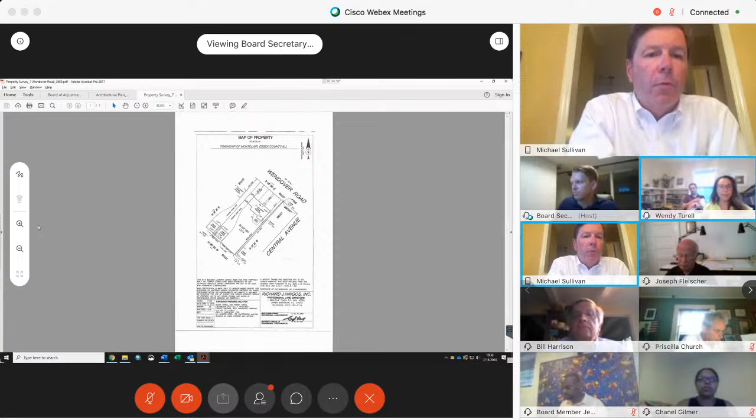And we also have Mr. Erik Schultz, the architect for the applicant as well. I'll swear you in. Mr. Schultz, would you raise your right hand? Do you swear to tell the truth in the matter pending before the board? I do. State your name and address, please. Erik Schultz, 35 Alexander Avenue, Montclair.

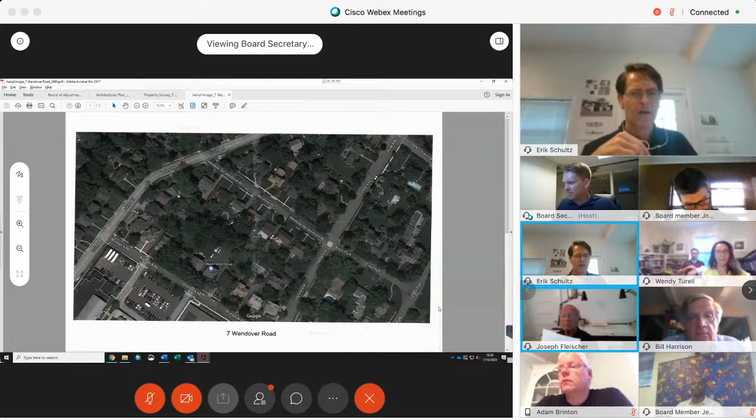If we go to A0, the first architectural plan, on the left you can see the footprint of the existing porch extends out about 12 feet from the footprint of the house, whereas the proposed would come out about 10 feet, 2 feet less than the current porch. The addition would extend along the line of a side wall, meaning the new addition would also be 4'3".

If we go to A1, the next drawing, it shows the existing condition in more detail, the existing porch in relation to the kitchen. And then if we go ready to A2, that's the proposed kitchen.

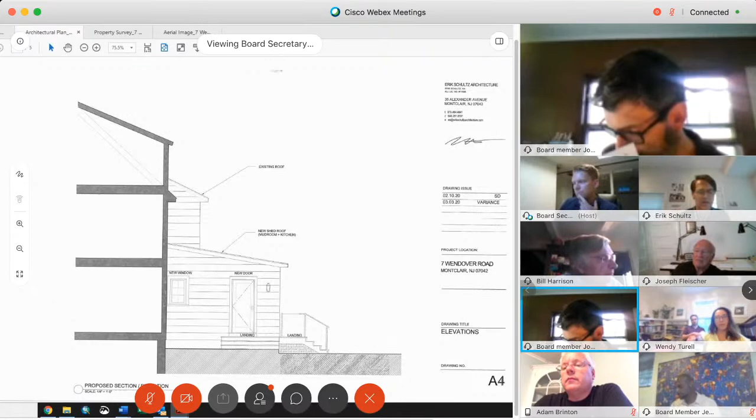But if you go to the next drawing, A4, that shed roof is a little bit steeper than the existing, which is very flat. This is a view from the interior side, looking at the new door to the mudroom, and then a window for the powder room. And that's basically it - kitchen, mudroom, and powder room, 18 square feet along the side lot.

Okay, are there questions from members of the board? I guess we should go through individually. Sure. Mr. Moore, do you have any questions? I do not at the moment. Mr. Fleischer, do you have any questions? I do have one question, clarification.

When I looked at the survey, it looked like the other yard was also under 10 foot. And though I know this has nothing to do with that side of the structure, do we not have to approve what is ultimately the total structure when it's there? So I just want to protect the applicant - there's no issue with the fact that that is not 10 foot on the opposite yard. And if it is, then if we're going to approve this as submitted, we ought to approve it with the recognition that both side yards are non-compliant.

Graham, do you know? I mean, the applicant is not proposing any change to the 9-foot side yard, and the ordinance requirement is 6 feet from one and 10 feet from the other. So it kind of depends on how you interpret this - the 9-foot side could be the 6-foot yard that is compliant, and the 4-foot yard could be the 10-foot yard that's deficient. So in this case, we could look at this as having one deficient yard. In the other case, it could be that both yards are deficient.

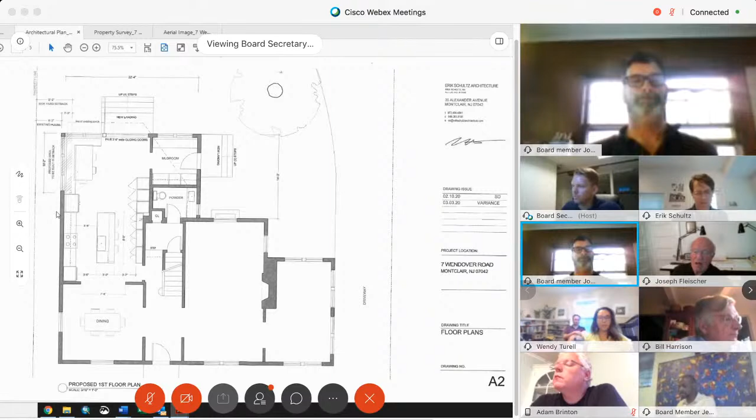Well, it's certainly possible, but not preferable in order to maintain a nice flow to the backyard. It's not a very wide kitchen, it's going to be about 11 feet from the wall to cabinet. So if we were to bump in, it would give it a bit of a tunnel-like feel, and maintaining that line reduces any awkward circulation but also makes it feel not so narrow.

Okay, thank you. That's it for me, Bill. Okay, Mr. Simon, do you have any questions? No questions. Mr. Birch, do you have any questions? No questions. Mr. McCulloch, do you have any questions? I just...

So if you were coming up the driveway and parked along the side of the house, you could enter the mudroom directly from the driveway without having to do a lot of patio stonework and eating up the backyard. Whereas the sliding doors allow you to come in and out from the kitchen to the backyard. They have a long and narrow backyard, so there are two separate entries instead of people coming in and out of the backyard or going to and from the driveway getting clogged in the same path.

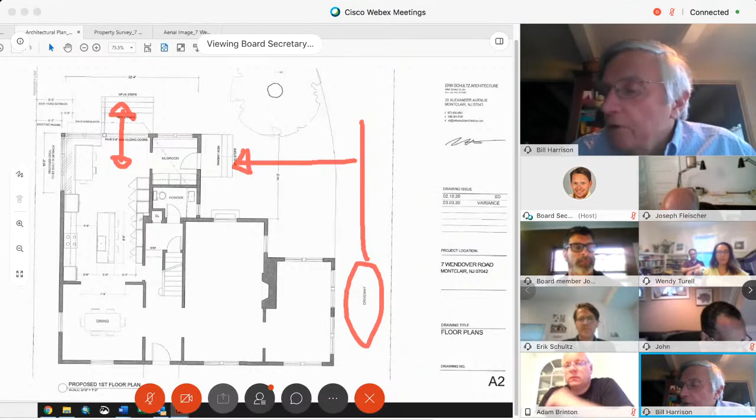Okay, Mr. Caulfield, do you have any questions? Yeah, actually, Erik, how are you? Good, how are you?

There's not going to be any windows on that side, are there? On the setback on the side of the new kitchen? Correct, those will be upper cabinets. But obviously the built-in seating area has a ribbon of windows facing the side. There are 3 new windows facing the side, and even though we're taking away 2 small windows, we're adding 3 large ones along that elevation.

That's the range up against that wall. And Erik, is there going to be a rail? Do you need a rail for that mudroom? Okay, all right, thank you.

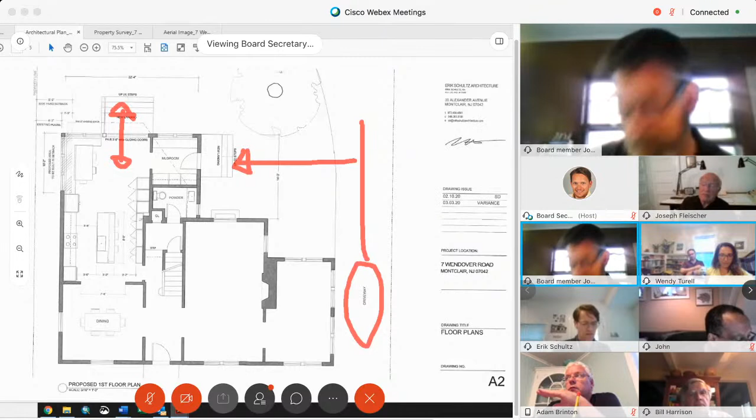Ms. Gilmer, do you have any questions? Yeah, I had a question. From what I can tell, the tree looks like it's going to be close to where some of the work will be done. Do you know if the root system will be disturbed by the work? My guess is that we're at least 10 to 12 feet away from where we're working, so I didn't think that would be an issue.

It's a small crawl space underneath the mudroom, so I don't think the landing will disturb it. We wouldn't disturb the roots in order to support the deck. There's ways to do that without upsetting roots.

And if for some reason it were to be disturbed, you would replant another tree in the place where I guess the dying tree would be? Well, I don't think we would disturb the tree. I think in that case, instead of doing a crawl space, we would just pour a slab of concrete at grade and not do the crawl space.

We'd figure out a way to do it without disturbing the tree in the mudroom area. I'm proposing a crawl space underneath it, but there's a possibility foundation work could disturb the roots. If so, I would not build the crawl space and just pour a concrete slab as the foundation, essentially pouring over the roots so we don't disturb them. It's more difficult construction, but if we don't want to lose the tree, that would be a way to save it.

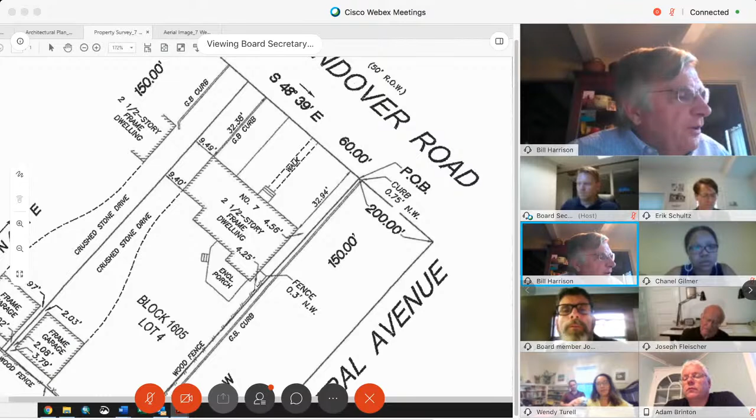Not that I have a problem, but I just want to clarify the dimensions. On the survey, it seems to indicate the front of the house is 4.56 feet from the property line, and at the rear your drawings show the existing house being 4 feet 3 inches. It would seem, which is the equivalent of 4.25 — I understand, but the house is at a slight angle, which would indicate that if you make the addition line up with the house, it'll actually get a little closer than 4 feet 3 inches.

I don't want to have you surprised, but your addition is half an inch too close to the property line. I think when I measured that in the CAD, it's still above 4 feet. Oh, it clearly would be about 4 feet, but you're asking for 4 feet 3 inches, and it looks like it'll be slightly less than that.

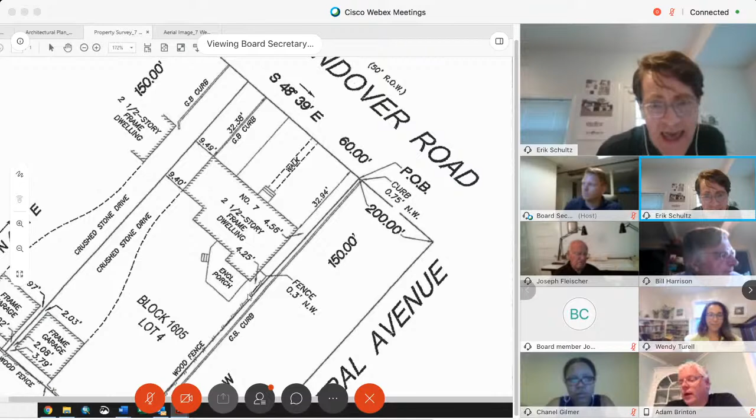It's entirely possible — I think it's not more than 2 inches, is what I'm saying. Yeah, it's a very small amount. I'm trying to figure out how best to word the condition, to make it clear so no one fights you over that inch or two. The difference between the front corner and the back corner is essentially 3 inches, and now we're going out 10 feet, so it could be 1.5 inches we're talking about. Well, I don't know if that's under a margin of error. It's one of those things that sometimes comes back to bite people in unexpected ways.

I don't know the best way. Are there any other questions from members of the board? I just want to follow up — we could probably say it shall continue the existing line of the house and get no closer than 4 foot to the property line. I think that solves it, and I support that completely.

Okay, Graham, you want to unmute the world? Are there any members of the public who have questions concerning the application or any testimony to give concerning the application? If you have anything whatsoever to say about the application, this is your chance to say something.

Anything further either of you wish to add before we discuss and vote on the application, Mr. Schultz or Ms. Turell? No, I don't. No. Okay, we'll start discussion with Mr. Moore.

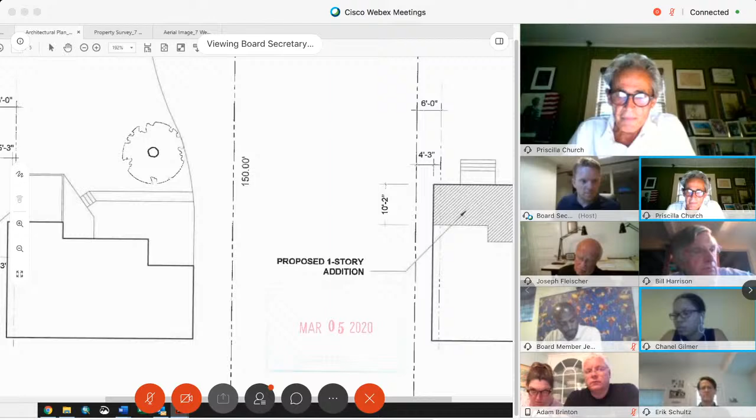Hang on one second. Mr. Sullivan, who was the next one? Mr. Simon, go ahead. Yeah, I'm in favor of the application. Okay, Mr. Church — I'm in favor of the application since that Wendover area, the lots are rather small to begin with, and I believe what the architect just proposed stays within what's there already. Therefore, I vote in favor of it.

Mr. McCullough? I'm also in favor, with the condition that I think the chair will set for the 4 foot proviso. Okay, Mr. Caulfield? In favor. Okay, Ms. Gilmer? Yes, I'm also in favor.

Mr. Fleischer: I'm in favor, with the condition that the side yard line of the house continue and get no closer than 4 foot to the property line. And I'm also in favor of the application. I think the applicant has demonstrated, given the existing location of the house, that they qualify for a variance and that it will not result in a substantial detriment to the public good or substantial impairment of the zone plan. It should have the condition Mr. Fleischer just stated.

Someone want to make a motion to approve the application? I make a motion to approve the application with the restriction that Board Member Fleischer mentioned. Is there a second? Second. Okay, Mr. Church? Okay, Graham, you want to call the roll? Sure — Ms. Gilmer? Yes. Okay, Mr. Caulfield?

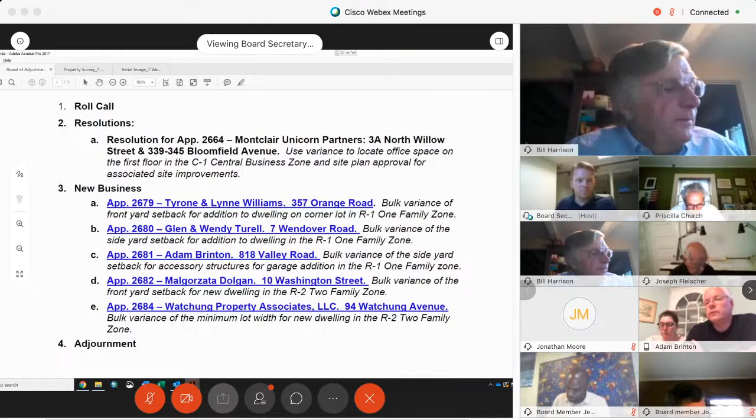Yes. Mr. Brinton, will you raise your right hand? Do you swear to tell the truth in the matter pending before the board? I swear. State your name and address, please. Adam Brinton, 818 Valley Road, Montclair, New Jersey.

Okay, Mr. Brinton, you want to explain what you're proposing to do to the garage? Sure. My wife and I have a detached garage in the back of the property, and the roof line is very low. We can't fit our minivan in it, and it needs repair. When we went to file for the building permits, we found out that because we have less than 6 feet of clearance between the property and the existing garage, we would need a variance to raise the roof line to the permitted 15 foot level. We have a little over 3 feet, 3 feet 3 inches. There's an existing pathway and a gate already there between the property line and our existing garage. To put it simply, we would like to put a new roof on the existing garage that's higher, and not change the footprint of the garage at all.

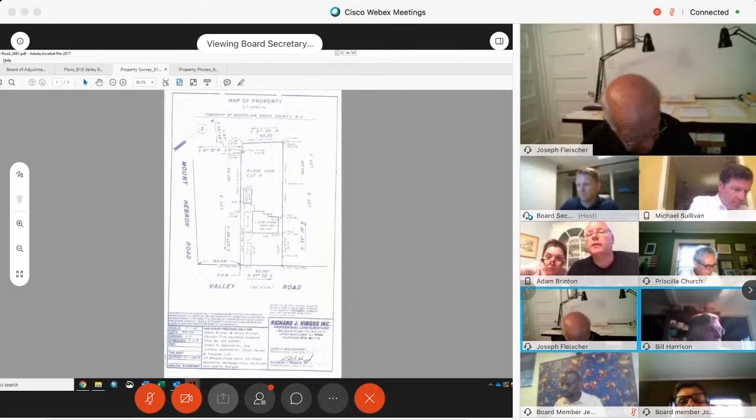Are there questions from members of the board? Mr. Fleischer? I do have a number of questions, actually. I saw the historic preservation report related to the property, so I don't know whether the applicant has agreed to follow the requirements. Will you abide by the requirements of the Preservation Commission, which has to do with the window configurations primarily and the materials? I apologize, I haven't seen the report.

I think they asked that the windows be 6/6 pattern to match the existing window, and we would have no objection to doing that. And I believe they asked for the roof to overhang a bit to match the style of the house, and we would have no objection to doing that either.

Okay, let me ask. The other question I have is there are no plans of what you're doing, but you're adding dormers as I understand it. And I have no idea, even for example, which way the dormers are facing from the documents. So I don't know exactly what we're approving.

Sure. The dormers go the length of the garage. The garage is 12 by 20, I think is the measurement, so they go the 20-foot length. So they would not be viewable from the street. Only the front of the garage is viewable from the street.

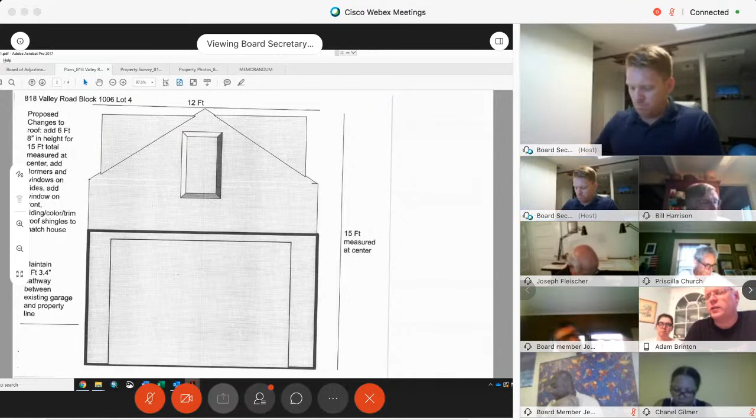I suppose they could, but then the roof wouldn't be balanced. And there's no adjacent structure to the garage. It's standalone, I suppose. It's detached, and there's no house next to it or anything.

And the property does rise up in the back, does it not? It rises up substantially. The back of the garage, there's some pictures in the application. I stand above it when I'm on the ground. The garage is built into a slope, into a hill.

I guess what I'm looking at, if you look at the photos you submitted. When I look at the array of photos on the sheet that has the 4 photos that shows the back of the garage, it also shows that structure on the right side in the lower right-hand photo. Graham, can you put those up? The photos? Yes, I have the photos. All right, keep going.

The issue I had was relative to the fact that the dormer is literally right on the property line looking into the neighbor's yard. Now, right now, we know that it's being used for storage only. So the question is, why do you need all the windows in there if it's storage only? We're assuming it's not being used for any other purpose other than storage. So I'm raising a question because I have some concern about the privacy of the people in the house next to you, in the rear yard.

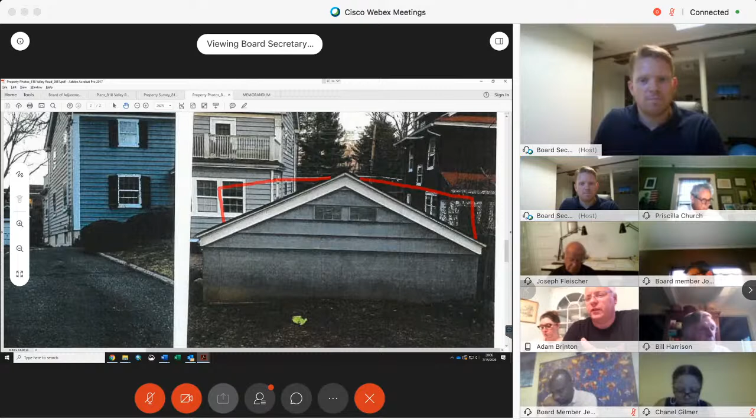Do you have an opinion? Yeah, I'm concerned whether the Preservation Society... Okay, which one's that? The Preservation Society was really concerned that it would balance out and not differ from or look different than the style of the house. So I'd like to keep it on the side, yeah.

The whole idea was to raise the bikes on racks and put our stuff on shelves and have the windows in that space. So yeah, I would like to keep the dormer. So that whole group of 4 windows, which will now be 6 over 6 windows, will be on both sides. That whole group of windows will be different.

Again, I keep seeing different pictures of what it looks like, I'm sorry to say. Because that shows the dormers quite a bit lower than the 15-foot, but the next illustration I saw shows the dormer virtually up at the same 15-foot height. Yeah, the windows aren't intended to be at the ceiling height. I apologize, I did these myself, so it's not an architect drawing.

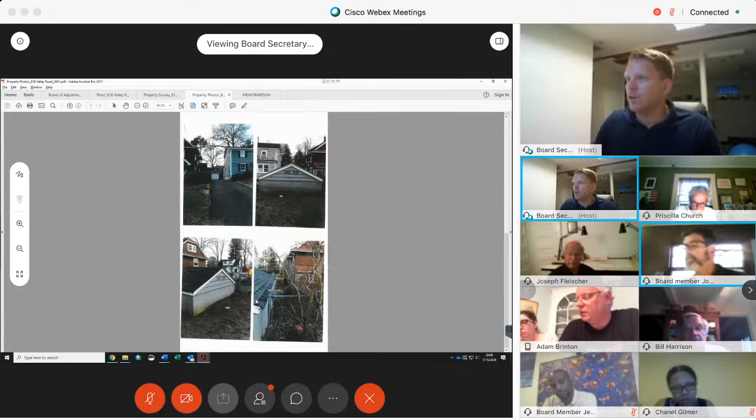It was just supposed to be a representation. The dormers that we're basing it on, the window wouldn't be at the roof line. The roof line on the other image, Graham, the eaves come out a little lower than the roof line and straight. This photo? The other drawing that we submitted. Oh, the other drawing, hang on one second. Yeah, that one shows the dormers virtually up at the same height as the 15-foot.

The next sheet in that set, keep going, maybe it's not the next one. That one shows that new roof line literally not even in the same direction as the one shown on the drawing. Right, the dormers would come... The documents don't show what it is we're approving, is what I'm saying right now, because that's literally a new extension on the upper floor. It is not what is shown.

If you go back to the previous sheet, it is not what's shown there, the previous sheet being the front elevation. If you look at what's shown on this drawing, then you look at what's shown on the front elevation, it's just not the same. I don't know how high this thing is for the dormers.

The dormers are supposed to be below the roof line, at least that's what I was told. So I drew them here below the roof line to show that they didn't go to the roof. The windows would be below the roof line, which is why on the side view they're below. And on the front, the roof line for the dormers, I was told it comes out of the top of the roof and down, so it's shown a little lower when you look at the front view of the proposed.

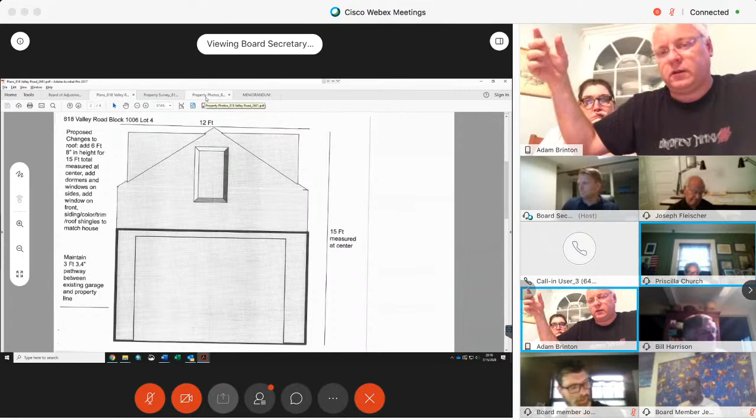Right. So maybe if I could explain it—I didn't want to change any of the existing footprint, I just wanted to raise the existing type of roof up by using wood on top of the cinder block garage. And that's what the contractor said he would build up, and then he would just build out dormers on the side. So he said to get approval for the dormers on the sides.

And the dormers would be coming out from slightly below the roof line, and the windows on the dormers—which I thought were called eaves, so I apologize—would be lower than that, which is why I drew them lower in the diagram. But I could see that I'm not an architect, and I apologize that it's not accurately depicting the scales that an architect drawing would.

But again, I'm not trying to change the existing footprint in any way. I understand. All I'm trying to find out is what is the actual configuration, and your drawings can't tell me that—that's my problem right now. I don't know what it's going to be like when it's the actual configuration.

Okay, well, I think Graham's trying to help me, and I'm trying to help out a little bit. Very appreciative—I mean, literally, figuratively, the view that Graham just drew is exactly what we're trying to do.

So let me ask you, Graham, since you're designing it—did the side of the dormers come down, or are they straight up and down? Because that's not shown in the documents.

Well, based on Mr. Brinton's discussion with the Historic Commission, he talked about these being essentially shed dormers with a sloped roof and then a vertical wall along the face of the dormer on each side of the garage for the extension. There are two vertical wall elements that will be added—one is this area, and then here at the dormer.

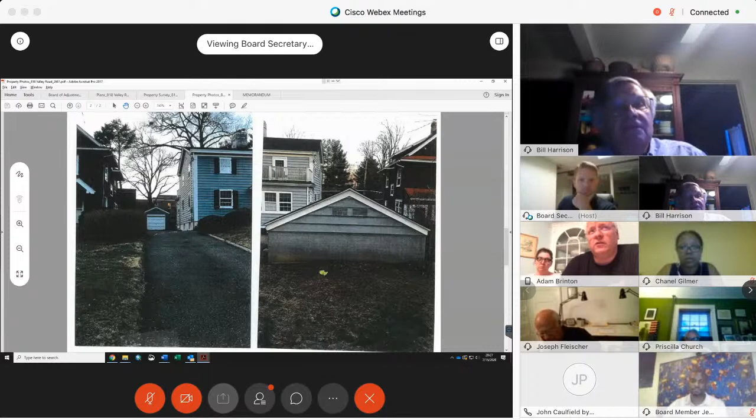Okay, so do you know how far out you would be extending it? It's the overhang on the house is about 6 to 9 inches. Yeah, so this here, yeah, it's about 6 inches on the inside, and with the trim it's like 9 inches.

Now I'm trying, I have the same concerns Mr. Fleischer did, but I'm trying to partially get an understanding of what this looks like, based on what you're actually going to end up with, based on the definition of height in the ordinance.

Graham, is it correct that the height will be measured based on the average height going all around the building? Correct. That's 10-foot intervals around the perimeter of the structure to the peak of the roof.

So based on the significant difference between the elevation at the front of the garage and the elevation at the rear of the garage, the entrance to the garage, the front of the garage, that's going to end up being somewhere between 18 and 20 feet above grade. Is that correct?

We don't know exactly how it's going to be, but just visually comparing the difference between the front and the back, it'll be several feet higher than the 15 feet.

I think Mr. Brinton, since you did the plans, you can tell us, the existing 12-foot measurement that you had on your plans, I think that's the existing dimension. Is that not correct? The front of the house. That's, I guess, the width, the height.

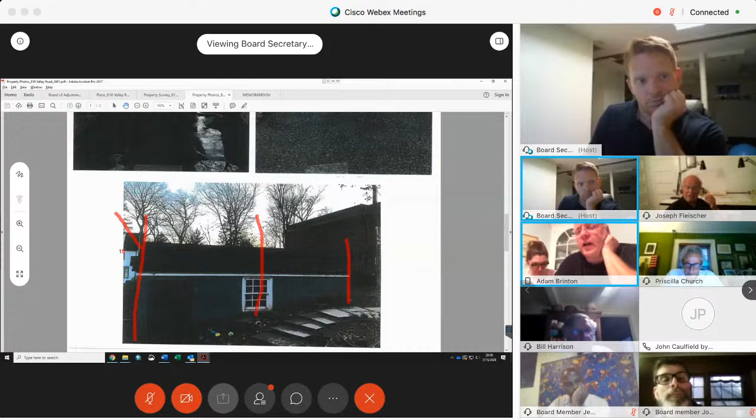I was proposing 15 at the center, measured at the center. 15 here? Yeah, which is, I thought, how you measured it. But at the peak, 15 at the center sounds like it would work. So, yeah, right, we have to talk in two dimensions.

So let me go back to the plan. So 15 would be to this center here, to the peak. 15 to the peak, yes. To this peak here, measured to the driveway at the entrance to the garage, correct?

Graham, I'm going to interrupt, because we're having a conversation which was exactly my concern. I don't know how high or what this thing looks like, period. I don't know where the 15 is measured from, because if I look at his drawings, the 15 shows the equivalent of what 12 was in the other house, which was 3 foot higher than the front of the building. And now we're talking about 15 feet from the middle of the building. So we have no consistency in measurement, drawings, or information.

And I don't know how you approve something without that information. I guess that's what, because we're not sure what's being talked about. Because there's a chance that will be 17 feet on the front if we're going to the 15 feet in the middle.

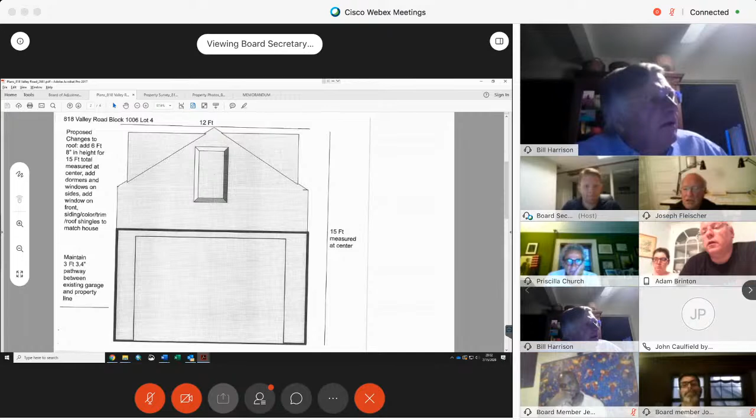I mean, we can make it 15 feet from the front. I apologize, I just thought I was supposed to measure from the center. Well, code, it's not how it's done, but that probably is effectively what would be how the 15 feet would end up being. So if it's 15 feet at the center, it probably would comply with the 15 feet in the ordinance, but that would mean the front of the garage would be several feet higher than that.

I think we're mixing up what he means by the center right now. I think he meant the center of the front of the house. Just the way we're looking at it, the elevation that was previously 12 was going to go up to 15. I think that's what he means by the center. Correct, that's what I think he means.

Not the way the ordinance is written. When we're using the word center, we mean the center of the sidewall or the center of the front at the peak. That's why I'm saying we don't know what this is about at the moment, unfortunately.

Okay Mr. Brinton, let me ask a couple more questions before we get back to this fundamental problem. Will there be any heating or plumbing in the building? No. Okay, and then I'm a little confused as to what I'll call the dormer level - will there be a floor there or not? No floor.

Okay, so it's just going to be a one-story structure that you're getting the extra height so you can do more things, as well as drive your existing vehicle into the garage. Yeah, that was the intention. So effectively, given it's not a big garage, the bikes etc. would be hanging above the car. That was the intention, since I had to do the garage roof anyway, and since I had to go through zoning, I thought might as well put the dormers on it so we could use it for storage too.

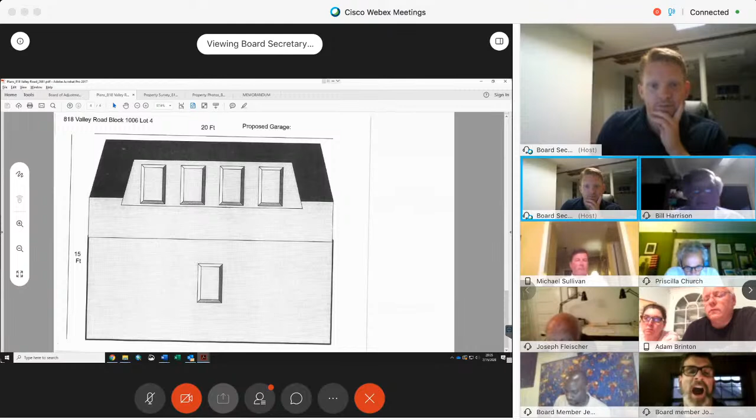Are the windows facing towards the school? Is this a public question? Oh no, this is a board member question. Oh sorry Mr. Moore, my apologies. May I answer the question? Hang on one second, let's just make sure there's no public questions. Last call for any public questions on the line. Okay, hearing none, we'll reset back up. Okay Mr. Moore, if you wanted to restate your question.

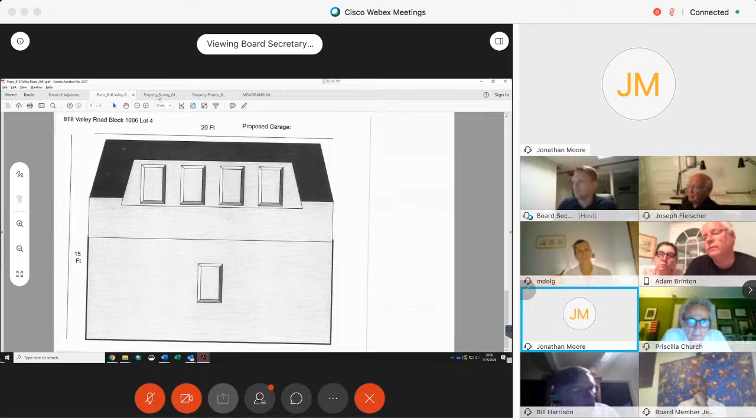Yes, my question is for Mr. Brinton. Mr. Brinton, the dormer windows, are they facing this elementary school or pre-K? No, sir. The dormer windows would be facing my property to my left. The elementary school view, the windows on the side of the school are probably back about 100 more feet, and it's not the classrooms. And Mr. Brinton, I've circled the facade in red that's visible from the elementary school, correct? That's what is visible from the elementary school, correct.

And there will be a window on that side? I hadn't planned on a window on that side. Okay, it'd be nice. I don't need one, no. Okay, thank you.

Before I give Mr. Brinton another opportunity, what is the board's preference in terms of how you would want to proceed tonight? I think unfortunately we may want to see a rendering that gives us a better view of what you were trying to convey to the board so that all members feel confident about it. I agree with that. It's kind of difficult to get the full picture without seeing the dimensions, and just leaving too much open for us to approve on the record.

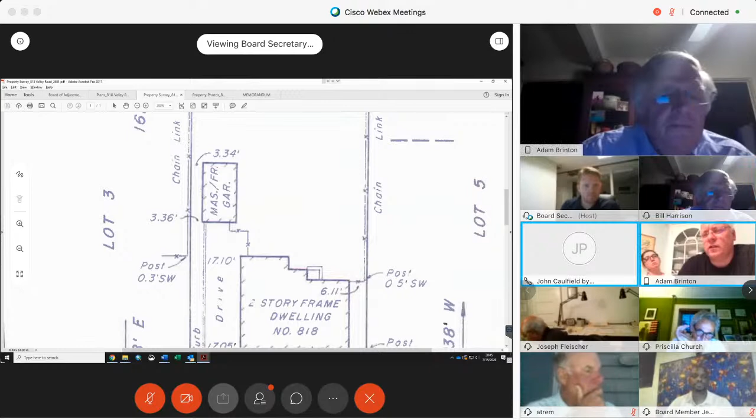Okay. Can I ask another question, since I'm going to have to now hire an architect and all this? So it sounded like a bunch of the questions were whether I was going to live in this, or there's a floor - would the board generally be okay with that? Because then if I have to go through this process, I was trying to avoid that.

But the reasons those were being asked - when we've had people coming in expanding their garages so there's an upper level, you're saying there wasn't a floor to solve that - those were, we normally put a condition that says no heating, no plumbing, to make sure it can't be used as residential space. That would require a bunch of different additional variances to do that, you probably wouldn't get that. So that's not why we asked the question. Oh, okay, the question was to make sure you weren't doing that. Okay.

So if I have to come back, and you're not meeting in August and you're not meeting probably till September, I guess is what was said. September 16th. I'm just trying to get my roof repaired before September. It's not, I can't get this. I'll just come back, okay. So I guess we'll come back and try to have more detailed plans.

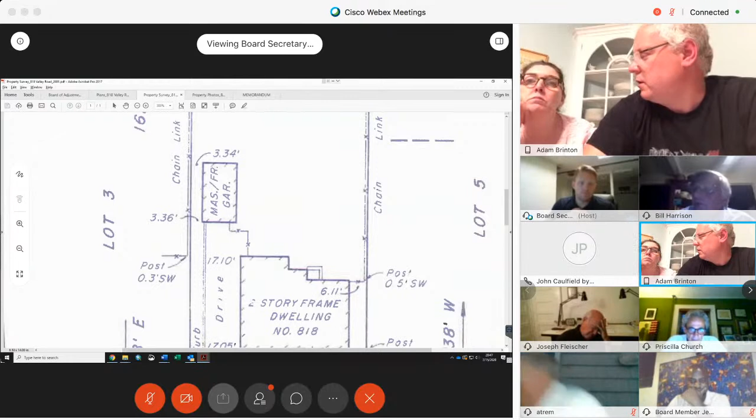If I just put a floor in there for storage, is that okay though? Yes, I mean, we're going to condition it to make sure it doesn't become living space, but we've had other applicants do that. I'm not guaranteeing an approval, but that's not inherently prohibited. Okay, because that would just make it easier in terms of drawing this up, the contractor said. But we were trying to make it just in the garage to make it easy for zoning.

Okay, thank you. Okay. Okay, so Mr. Brinton, just so it's clear on the record, you're requesting we carry the application to our next meeting. Is that correct? Yes, please, and I'll submit more detailed drawings for your next meeting.

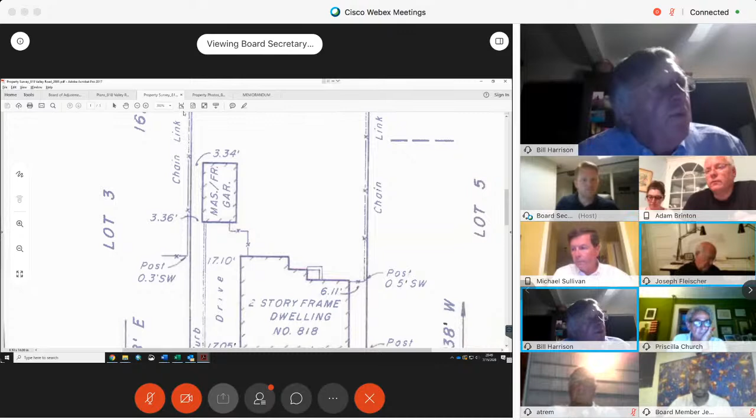Okay, so Mr. Brinton, we will see you on the 16th. First, start talking to your contractor about what he's capable of in terms of doing plans, and if not, go from there. Thank you. Thank you.

Next application is that of Malgorzata Dolgan, owner of property at 10 Washington Street. This is an application for a variance to construct a new two-family dwelling on the subject property. Property is in the R2 two-family zone district. Property is designated on the township tax maps as lot 16 of block 3010.

A variance is requested from Montclair Code Section 347-18B, to permit a lot width of 31 feet, whereas the required minimum lot width is 60 feet.

A variance is requested from Montclair Code Section 347-45B1 to permit a front yard setback for principal buildings of less than the required 25 feet. A variance is requested from Montclair Code Section 347-45C1 to permit a side yard setback for principal buildings of less than the required 6 feet.

A variance is requested from Montclair Code Section 347-45E to permit a maximum building coverage of greater than the permitted 25%.

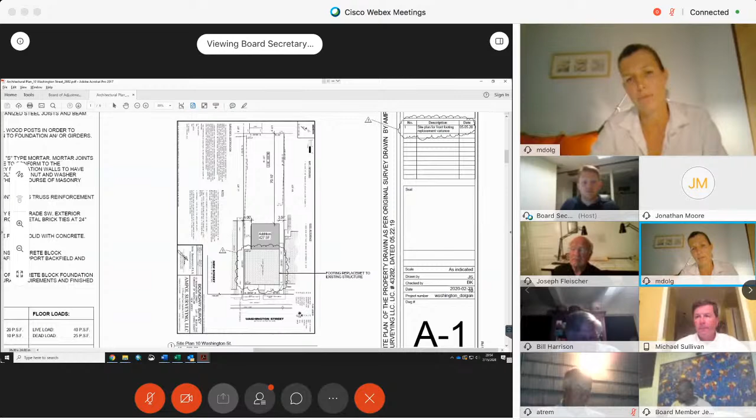Okay, let's clarify legally where we are. We approved a variance for the addition back in December. Because the applicant is to demolish the entire building, we are reviewing the entire building now. It is, so she needs a variance for the entire structure at this point. The series of variances, it's as if the building was not there. So, okay, Mr. Fleischer, do you have any questions?

Mr. Fleischer, did you have any questions?

Yeah, I guess my question is, in a sense, what I'm hearing is we're really starting from scratch, because she gets no benefit from that particular original footprint. Is that my understanding, Mr. Harrison? She is constructing a house on the property. There's nothing stopping us from considering or not considering that there was a house on the property a few months ago, but it's okay. The house is not grandfathered in any sense.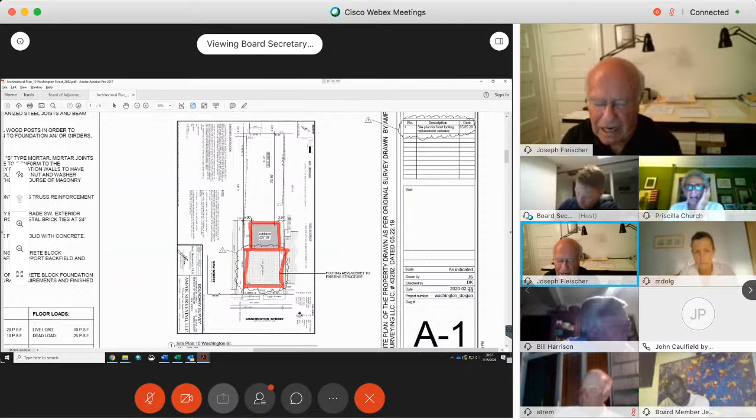And I'm wondering why not consider a different form that is more uniform for the entire building itself, as opposed to having what was once there as one building, and then as if there was an addition to it as a second building. I'm not understanding the logic of doing it, other than perhaps speed, but it seems to me that it's not a logical way to approach a 31-foot wide lot if we're not dealing with the existing structure. So I have a real concern about starting from the standpoint as if it was, emotionally or mentally, still standing there. I'd like to hear the applicant's reason for starting at that point, as opposed to rethinking it within the context of a new building within a narrow lot and coming up with a design that really is consistent and works nicely for that particular site.

Mr. Chairman? Yes, Mr. Church.

Right now, there's just a hole in the ground. There's nothing there. So my feeling was that what we're doing is we're looking at a new set of plans for a new building. The old building is not there anymore, it's gone. All that's left in that property are cinder block walls across the back, if you go look at it. But what she's proposing, I assume, maybe I'm dead wrong, is to build a new building in that vacant lot that's already dug out.

Am I correct that that's just going to be a new building? Yes. Are we relying on the drawings that we approved in December, or are these drawings different? Am I right or wrong? Ms. Dolgan, are these drawings basically the same as what we approved? Yeah, the drawings are basically the same. The layout is basically the same.

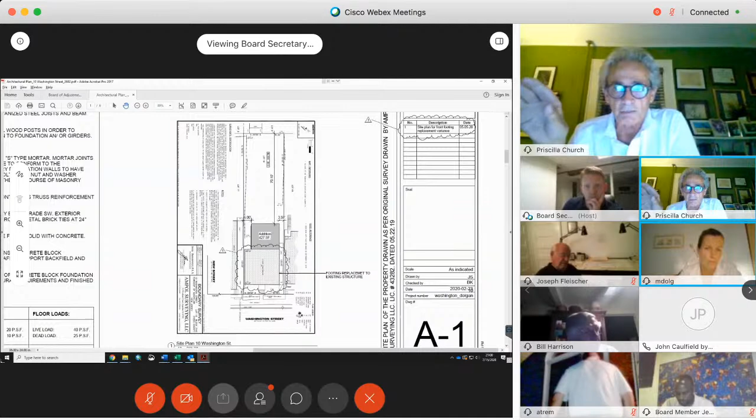So what we're looking at is a new building going up, because the old foundation was taken out. You want to put a new foundation in using the same dimensions and drawings for the building that you presented to us in December? Yes, because I couldn't save the old foundation, there was almost none. I understand that. By looking at the property, there's nothing there, it's just a hole in the ground.

Correct. So, Mr. Chairman, I have a question. If we already gave the variances for the previous design, then what is different now? If the dimensions from the foundation are following the old plans, what is the new variance that we're trying to approve here?

Well, the difference is that the application that was previously approved was an addition to an existing building. That building is now gone, so you have a lot that is essentially undeveloped. So it's a different application. You may view it as meeting the variance criteria, but it is a different application and she needs a new variance.

Okay, so it's considered a new variance, but it's the same conditions in terms of the side yard because of the dimensions—she's copying the previous dimensions. You may determine that there's a hardship based upon the lot width and these variances are needed and appropriate, but she needs new variances because the building is now gone.

Right, and just to follow up on that, we did not give a variance for the existing structure. She had set back the addition further from the east side of the property than the existing structure was, so we did not give a variance. She's now seeking a variance for 0.9 feet from the eastern side. We did not grant such a variance before because it was not necessary, so that's a new variance.

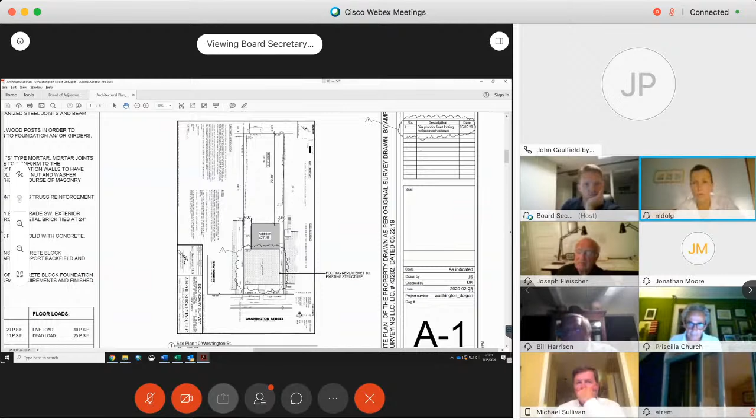When you had the inspection done on the home, did the inspector not notice that the foundation wasn't in good condition? You mean like a home inspection? Right. No, because there were so many things in the basement that you couldn't even see the condition of the foundation. You could barely even get into that basement.

Interesting. Thank you. I have a question. Yes.

I can't imagine that we would approve a new building with less than a 1 foot dimension from the property line. If we have to view this as a new building, we can't view it as if we're replacing the existing piece with a new building that's even wider than the addition we approved. The sense that we should approve something with less than a foot, with the kind of mass we're talking about, with less than a foot from a property line is not something I think we can do.

We might think it's okay, as in the first one, to have 6 foot on one side and 3.5 foot on the other side. That's possible. We could end up there. But we shouldn't be thinking about building a new building and putting it less than a foot from the property line. That's my sense, and I think that kind of precedent is very bad for a whole variety of reasons.

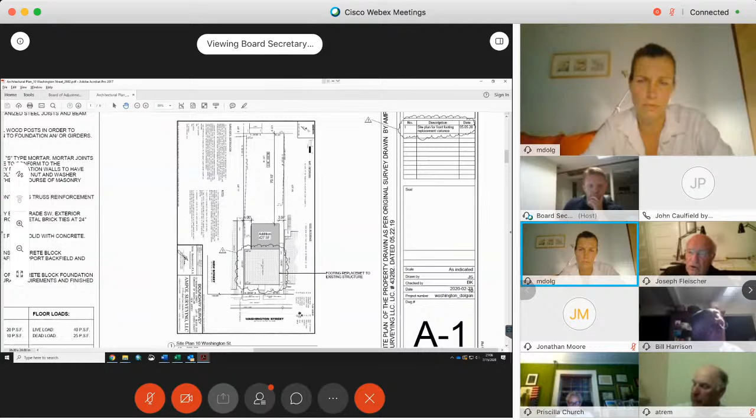I think it would be very dangerous for us to simply approve the old footprint because it had been there. Because then almost any structure that comes before us that has an existing footprint—they literally take everything down, period, and then say, I still want all the rights that the old property had. I think that's a dangerous thing, and that worries me a great deal if we do that.

Okay, Ms. Dolgan, do you want to give an explanation as to why you're seeking the various variances? I'm sorry, I couldn't hear you, Mr. Chairman, can you please repeat? What is your justification for the variances you're seeking, other than that you want to match the footprint of what was there?

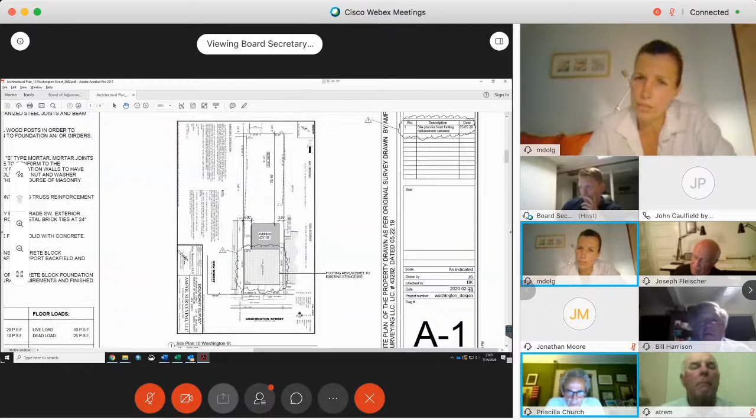Not really, Mr. Chairman, no. I mean, what I can do, if with your permission, maybe on the left-hand side where the side setback right now is only 8 inches on the front of the property and 9 inches on the back, I could push that whole wall to the right and do a workable setback and have 3.5 feet. Push that whole left wall of the existing structure over, and give it a more workable setback. Because then I can still work within those parameters with the design I have.

Okay. I mean, you've had a number of applications in this neighborhood, and I'm not trying to push you into something tonight before you have a chance to think it through, but have the building widths varied on the different projects you've already done? Yes, they have. Okay.

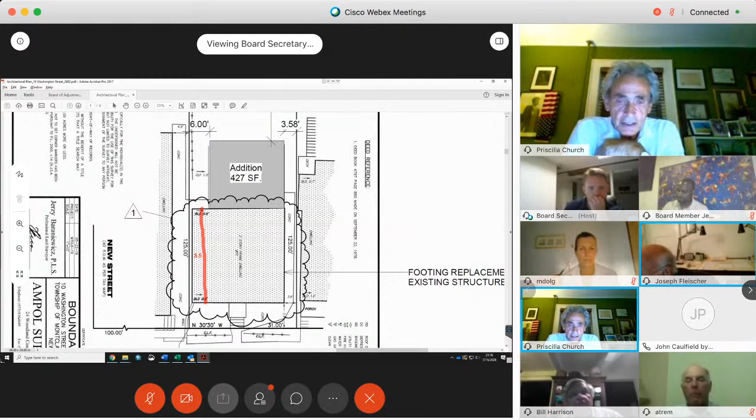Mr. McCullough? Yeah, the question I have is actually about the property next door, lot 15, the White House. Is that house currently occupied? Which property are you referring to? The White House, based on the picture that we have. Is it the dwelling to the right? Yeah, it's lot number 15. It's the one we gave a variance to a month ago. It's 12 Washington. Ms. Dolgan is currently renovating that, I believe, as well.

Okay, right, she is renovating. That's the one we gave a variance and said the parking had to conform or she had to come back. So we're still waiting for her to come back, or she's going to make the parking conform, one or the other. But for the improvements to the house, those are all approved by us.

Because the question I have is, given the fact that she owns both pieces of property, whether or not she can look at those in a way in which one actually complements the other. Because it is a very narrow lot, and I would agree with Mr. Fleischer. I think this beckons an opportunity to do something radically different than what we were considering previously. So I would be hard pressed to support simply maintaining the original design.

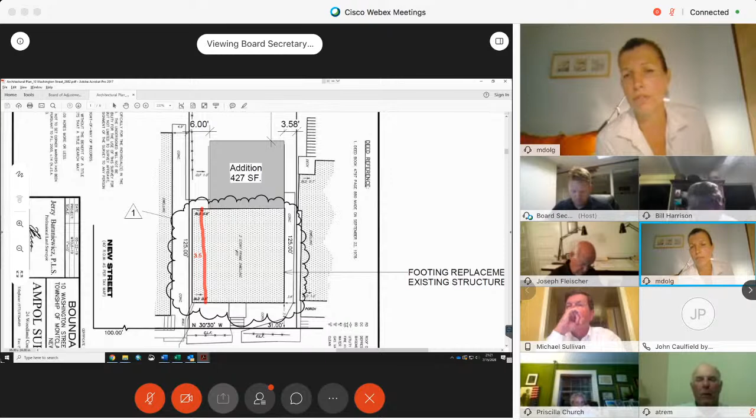Mr. Chairman, I have a question. The buildings across the street are really nice, and I considered doing something similar. However, they are 71 or 73 feet deep, while this building is only 47 feet deep. I know last time when we were going for a variance, the board members were concerned with the addition sticking out, then building on the left, building on the right, and then the church. I would love to do something like what we have across the street, but those buildings are 70 feet deep. If the board members and you, Mr. Chairman, are okay with that, I agree with you — it's a beautiful design and I would love to explore it. But my only concern is that I would be about 25 feet past the existing church and existing building on the left.

Right, I'm more looking at it in terms of the width they propose versus the width of those lots. They had some issues and were providing parking in the rear. I think what Mr. McCulloch said, in terms of having this building fit in with the building next door, makes more sense than having it duplicate the architecture of the buildings across the street. But looking at those in terms of the types of relief we're willing to grant, we are going to look at this in terms of how it relates to its neighbor, which we just approved a variance for.

Since you own both properties, you have an opportunity — to be clear, at least as to my opinion, if across the street they had come in with two totally different designs for the two different buildings, I think we would have had a problem with that. So it makes sense for the design of this building to be closer to that of the building on the right side as you face the lot you're currently renovating, making sure it fits in with that building rather than trying to match the others. All I'm saying is, looking at those in terms of the type of relief we granted, you have to consider the characteristics of the lot in the context they're fitting in with.

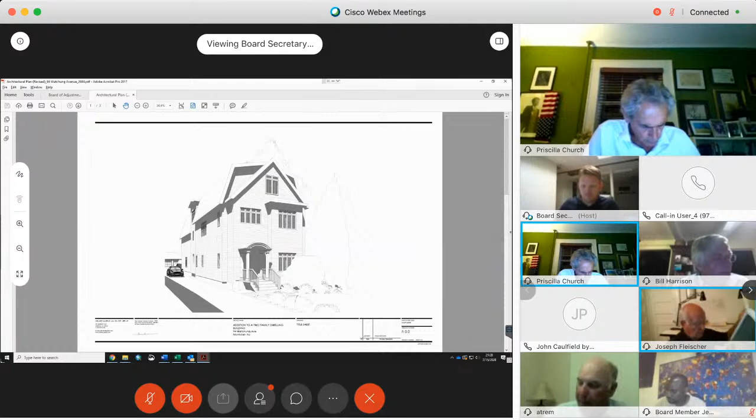Mr. Chairman, members of the board, Alan Tremblay appearing on behalf of the applicant, Watchung Property Associates LLC. This is an application for variances in connection with my client's proposal to renovate and expand the existing two-family dwelling at 94 Watchung Avenue. The property is located in the R2 two-family zone, and it's currently a two-family dwelling that will continue to be a two-family dwelling after the improvements are completed. There are a number of existing nonconformities not really affected by this application, including a non-conforming lot width of only 41 feet. I believe there are really only one, perhaps two additional variances, both fairly minor, required for this project.

So I'd like to begin by calling the project architect, Genaro Salerno. Mr. Salerno, would you raise your right hand? Do you swear to tell the truth in the matter pending before the board? Am I in video yet or not? You're not on video.

Can you see me? Yes, we can see you now. Could you state your name and address, please? My name is Genaro Salerno, 49 Derwent Avenue, Verona, New Jersey. Mr. Salerno, you're a licensed or registered architect in the state of New Jersey, is that correct? Correct. Go ahead, Mr. Tremblay.

Yes, and you prepared the plans that were submitted to the board and that are shown on the screen? Yes. All right, why don't you review the plans for the board and perhaps start by discussing the existing building.

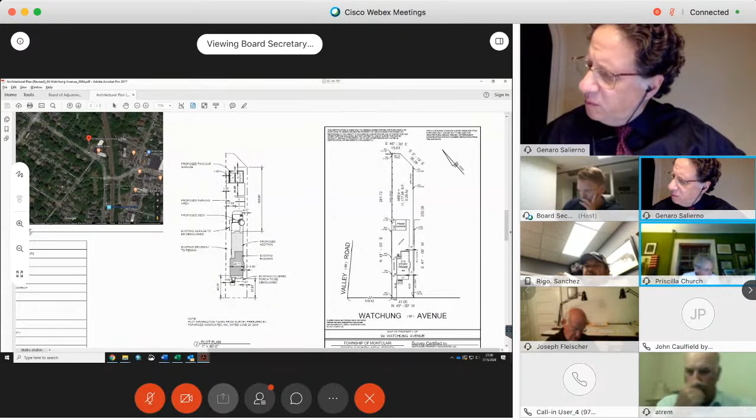The property is narrower than what the variance requires right now, and the width of the house is about 26.7 feet, which makes it exactly the required width by the zoning, like the 65%. The front of the house is typical to many different houses on that block, with a porch in front. The house needs a lot of attention. My client purchased this house recently and is committed to improving the whole property.

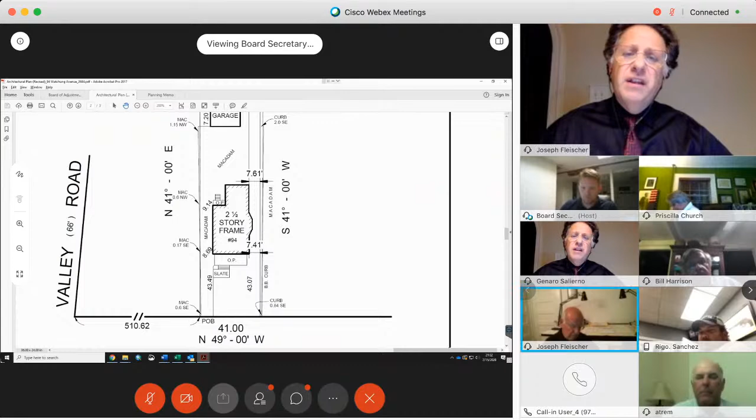Can you indicate the side yard setbacks for the existing structure as shown on the survey? It's difficult to read, but let me zoom in. The front setback is shown as 43.07 feet. The survey shows the right setback is 7.41 feet; however, that doesn't take into consideration the bay, which is about 5.6 feet from the property line. On the left side, the existing setback to the property line is 8.69 feet.

There's a driveway shown on the left side of the property, is that correct? Correct. There is a driveway that is mainly on the property line, and actually it goes out of the property line, about 1.15 feet onto the neighbor's property, as you can see. All right, then why don't you go on and talk about the plans you've prepared for the renovated building? Okay.

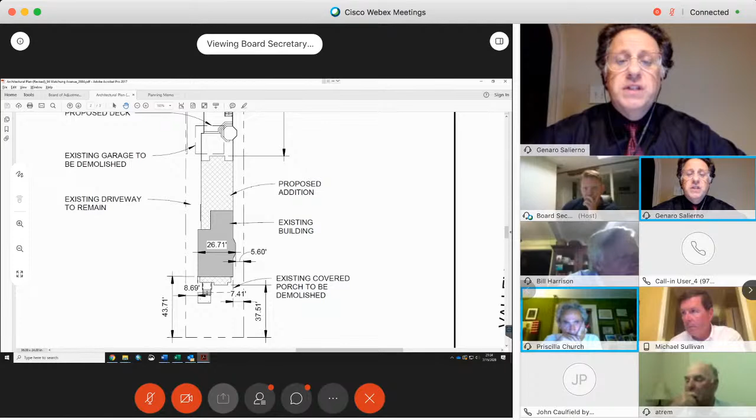Also on the same page, we can see the new or proposed site plan. The right side stays the same as we have it now. The setback, the right setback is 7.41, and also 5.6 at the bay, just like existing. On the left side, the existing house stays where it's located now, at 8.69 feet. However, the addition, either the front part that is about 6 feet from the existing building, and the rear part, they are larger. They are further away from the property line, about 10.9 feet from the property line.

That's right, that line there. So we are improving whatever portion is proposed. It's improving a little bit more over the existing.

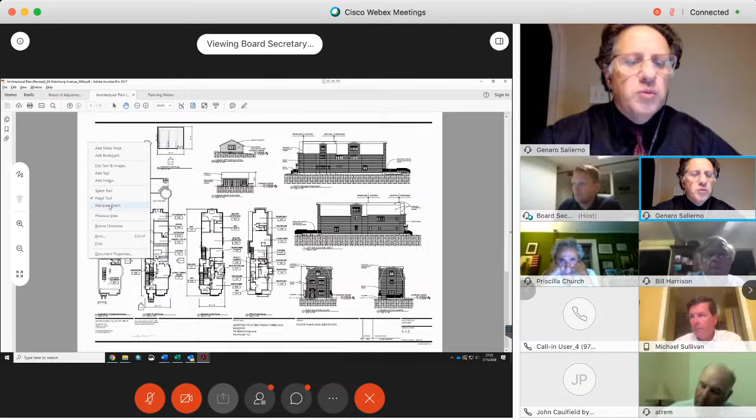So if we go to the next page, if we look at the next page, okay, there you go. Let me see, so I can zoom in and get it. Which section would you like me to zoom? Okay, yes, we can zoom to the first floor plan, detail 2.

Okay, so this is the first floor plan. We have an entrance to both units. The stair at the left goes to the attic floor, and then you enter the main unit. This unit has, in this floor, living room, kitchen, basically the living areas, a pantry, 2 half bathrooms, an office, and a little kitchenette in the back just to service the deck we have in the back. There is an internal stairs that take us to the second floor, and the second floor is detail 3 on the same page.

On this floor, we have 3 bedrooms and 2 full bathrooms. And then the floor above, which is considered a half floor because it's a tiny little bit less than 75% of the floor below, we also have three bedrooms, and this has 3 full bathrooms, besides kitchen and living area.

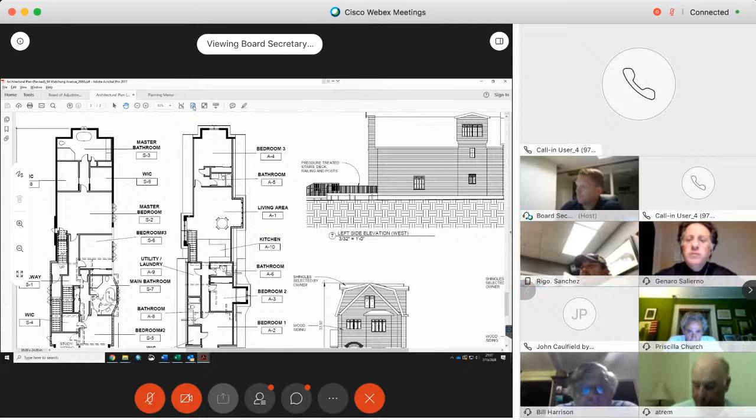Correct. The rear of the property, we are going to have a detached garage. Well, first at the rear, we're going to have a deck. After the deck, and it's depicted here, we have 3 parking spaces. After the 3 parking spaces, we have a 20-foot area that allows cars to come in and out of the garage, and then we have a 2-car garage.

And the 3 parking spaces that are shown on the plan, are they set back at least 4 feet from the property line? Yes, they are set back from the right property line 4.31 feet, I'm showing. And then the garage, I assume the garage is set back at least 4 feet as well? Yes, from the side yard.

And then you indicated that the existing driveway is, well, what are you showing in terms of the driveway to the rear of the property? The existing driveway is going to be extended, is that correct? Correct. What we are doing is, if you see where you have the pencil, there is a dashed line that is the existing garage that is going to be demolished. So from there, I go in 1 foot, and then I continue towards the back. Okay, and the 1-foot driveway setback complies with the ordinance requirement, is that correct? Correct.

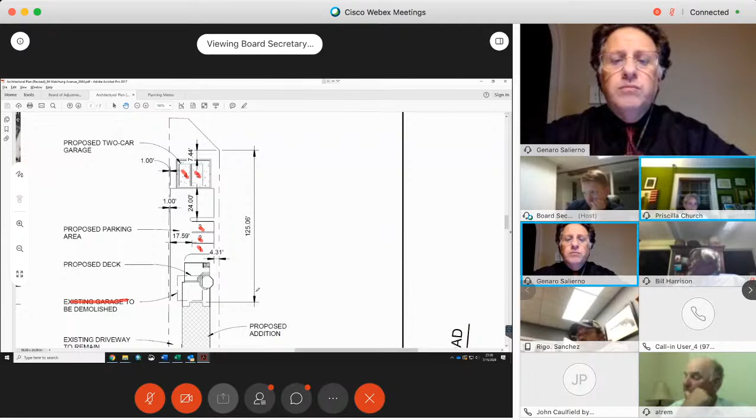One other question. With respect to the building width and the 65% maximum required by the ordinance, I think your original plans had indicated that the proposal was going to be slightly non-conforming by 0.8%, correct? But okay, and then the revised plans that were submitted indicated that the building width is now 26.7 feet, which complies. Is that right? Yes, yes.

The survey was not dimensioned, so I had that discrepancy that then I went again to the field and confirmed that that was the actual dimension. Okay, so there's no variance required for building width in your opinion, correct? Correct. Okay, and then with respect to the setbacks, you indicated that the new addition will comply with setback requirements. Is that right? Correct. Okay, and one then, side, with respect

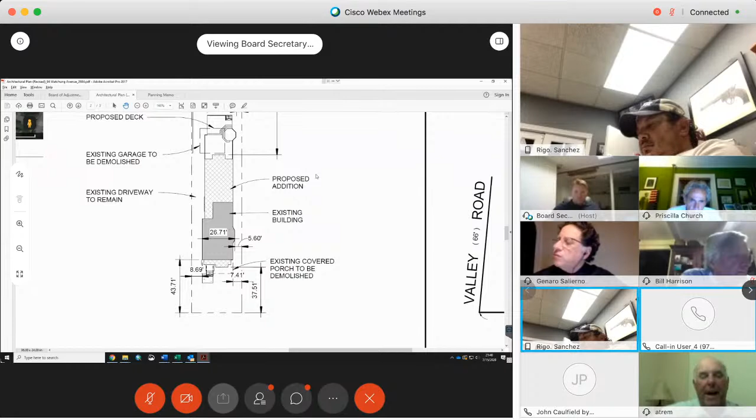to the existing house, you're going to add some additional height to that structure, is that right? Yes, the new building is going to be higher than the old building. And you're proposing that the sidewalls of the original building, as expanded upward, will align with the existing sidewalls of the house, correct? Correct. And that triggers a variance because those existing side yards are non-conforming, right? Correct. Okay, all right.

I think that's all I have for Mr. Salerno, Mr. Chairman. Mr. Fleischer, do you have any questions?

I guess it's almost the last question. Are we going to actually be able to save this existing house, or is it not being saved? Is it essentially a brand new building on the site?

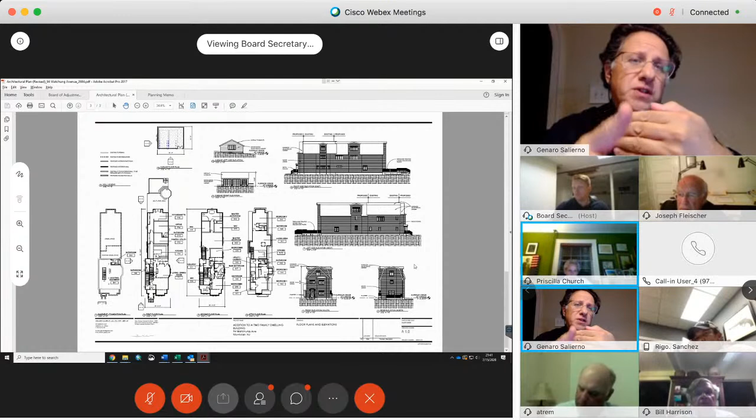Well, on the inside we're demolishing I would say 90% of the walls. On the outside, I had the choice of leaving the 2x4s and sistering 2x6s higher, but I thought that didn't make sense. So my recommendation is to just remove the exterior 2x4s and put in 2x6s. The reason is the energy code — the house would be more energy efficient with 6 inches versus 4 inches.

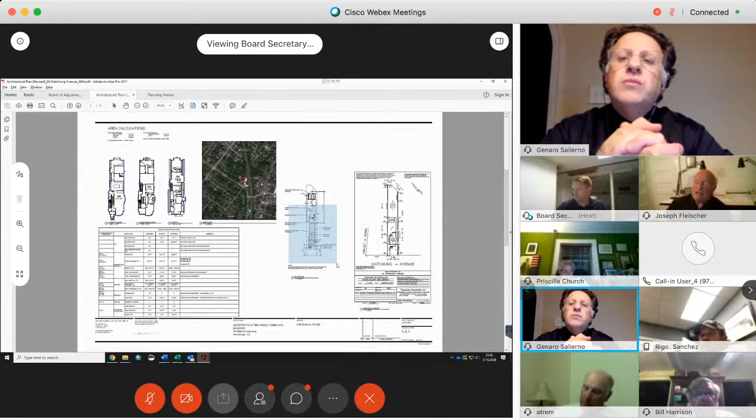So of course that leads into my next question. If this is essentially being rebuilt inside and out, why can't we get the house narrow enough to meet the yard requirements without granting variances for the yard? That's the basic question we've been faced with on more than one application tonight. If this is, in essence, a new building — the front is new because the porch is going away.

You'd like to rebuild the sides anyway because you don't want to use the 2x4s that are there — you want 2x6s. I can't imagine, if 90% of the interior is being redone, that we can't find conforming side yards in this 41-foot lot, because with conforming side yards you still have a 25-foot wide building. You're only talking about a 26-foot wide building at the widest point now.

So I'm trying to understand, if you really want to rebuild it, what is the reason — I mean, you're picking up a few inches, but you want to rebuild it anyway. So the space is either coming out of the inside when you go to the widest. I just don't understand why this doesn't give you the opportunity of building a very nice building on this site with conforming yards, where you could do virtually anything from day one.

I'm not understanding the complete logic when I look at the changes on the interior, which are virtually all redone. You yourself have acknowledged the outside walls would be better at 2x6 than 2x4. Why aren't we building that building? We're virtually starting from scratch anyway. I'm not understanding why we don't do it the right way and build a new building that conforms at least with the yard lines and move forward on that basis. I'm not quite understanding it.

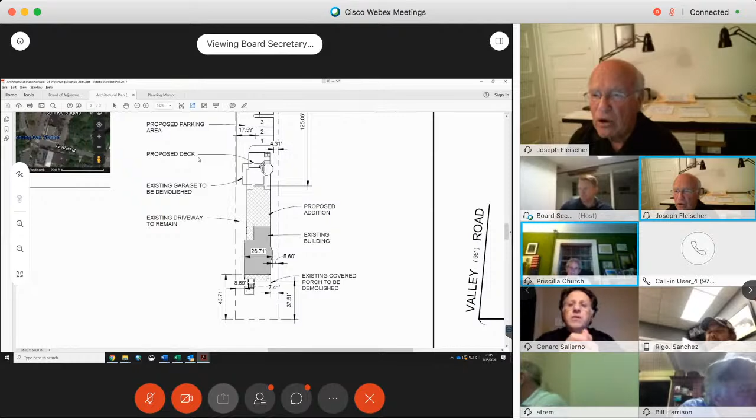Yep, I understand the reasoning. Let me ask one other question. Is the only way up to the attic apartment through the one stair that is literally a cascading stair from the attic floor all the way down to the first floor, and that's the only way in and out of the apartment — is that one stair? Correct.

And how do you subdivide the stair? I mean, maybe it meets code, but that would surprise me. You're going up probably 25 feet or so, and that's the only way in or out of this building. So if this frame building catches on fire, how does the person whose apartment is only on the third floor come down?

Well, what the building code requires is to have egress windows on bedrooms.

Actually, the windows that we are placing are casement, and all the windows are larger than egress, so that would be the way. I haven't done a two-family house recently that would have two different stairs. It used to be that towns would require maybe a fire escape, but the answer is if it meets code, it'll meet code. I'm just concerned about that kind of length of run.

I presume you can put the multi-hour wall ratings between the stairs and everything else, but that's going to certainly create a pretty thick wall as opposed to two back-to-back units, one entered from the back, one entered from the front, and then they each have their own, almost like two buildings on the first floor. But that's your decision, that's fine.

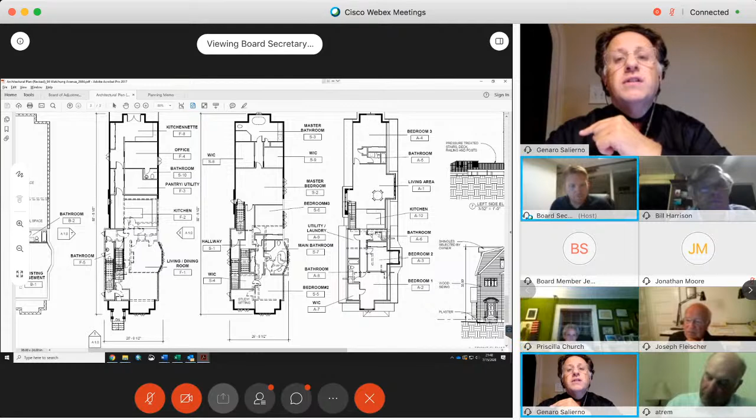The plans that you have were changed from the plans that were originally submitted, and this report is of the first submission. Yes, and I apologize, I wasn't able to update my initial report, so the 3rd bedroom of the 2nd unit was added while I was away.

Mr. Caulfield, just one question. The kitchen that you have on the first floor, it's kind of tight and the office is giant. Is there a reason why you have it that way?

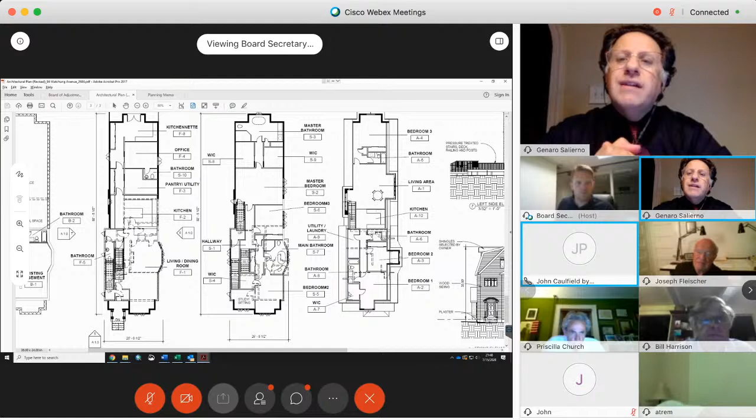Well, if you see the kitchen, the main kitchen is on the front, not on the front of the house, but you have the living room, and then there is a kitchen. Whatever is in the back, it's just that. Oh yeah, that's a kitchenette. What is that? Okay, I see what you're saying. Okay, thank you.

Ms. Gilmore, do you have any questions? No, I'm okay. Is that a hot tub on the deck? I just wanted to find that. No. What is it?

I have another question when the opportunity arises. That's a design, it's a couple of steps higher, that's all. Is that an opening there? No, there is no opening. It's just an octagon raised a couple of steps.

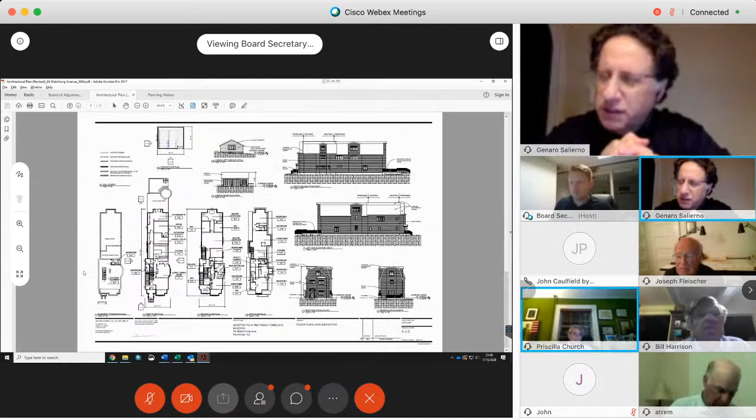Last question, is that bathroom in the basement existing? I'm sorry, I couldn't hear. Is there a bathroom in that basement today? There is a bathroom, yes. No, today no, that's a new bathroom. Okay, all right, thank you.

Ms. Gilmore, do you have any questions? None at this time. I have another question, Mr. House, maybe come back. Mr. Fleischer? Can we look at the first floor plan again? Just essentially the first floor plan.

The first floor, yes. I see a kitchen, then I see an office, and then I see a kitchenette. Can somebody explain that to me? Because we have multiple kitchens in there and a separate entrance for that back area, which is called an office, and even doors that separate it from the rest of the house, and a kitchenette added there. Can you clarify that?

Yes, this owner is a friend of many years, and we do a lot of barbecues. I'm from Argentina, he's from Dominican Republic, and usually one of the things that houses lack is when you go inside the prep area. That's basically what it is, a prep area for whatever is going to happen at the deck. Thank you.

I just want to go over what variances are still being sought. Can you go over what you still need a variance for? Okay, let me just read from the original report.

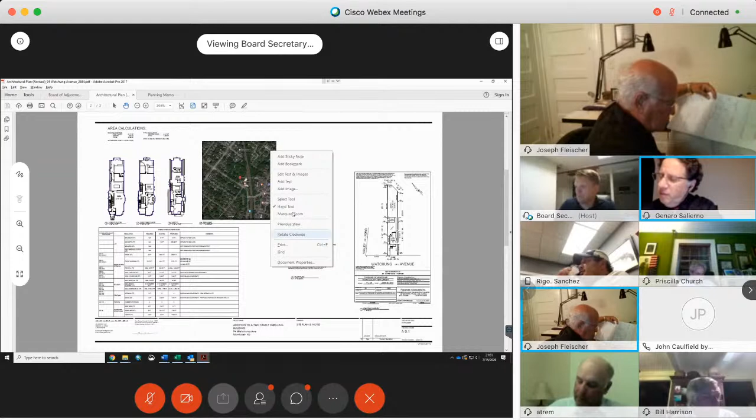It says that Montclair Code 347-18E requires a variance for minimum lot width. So we need the minimum lot width variance. We need a variance for minimum side yards. Then the next one, we don't need the building width variance.

And then we have a minimum setback, well, there is one of the variances that was mentioned here, a setback for the off-street parking areas. But we saw, and if we can see the proposed plot plan, the actual parking is a little bit over 4 feet. Now from the left side, it's basically maybe a matter of interpretation. It's just a driveway that goes to the garage. So you can interpret that as part of parking and say it needs to be 4 feet, or you can say that is just the driveway and 1 foot would be okay.

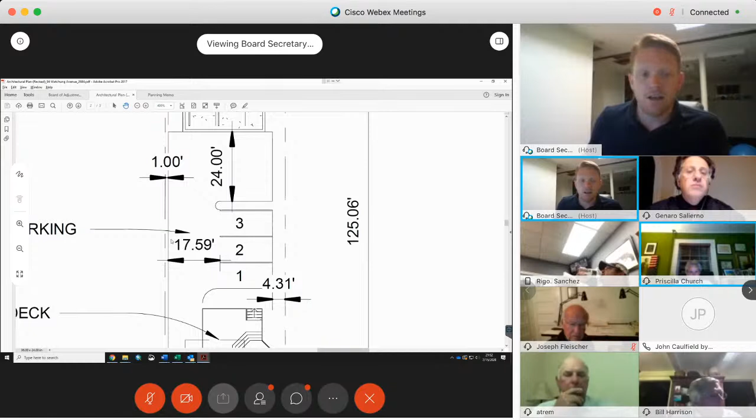Just for the benefit of the board, as part of my preparation of the planning report that accompanied your application materials, the department views this area to be a parking area, so that 1 foot setback is deficient, not a 4 foot setback for the parking area. That's why we've identified it as a variance.

Okay, I want to be sure we're all on the same page. So it's the three variances that are needed now, and not the building width variance. Is that correct? Right, okay.

Okay, I don't have any further questions. Are there any members of the public who have any questions concerning the application?

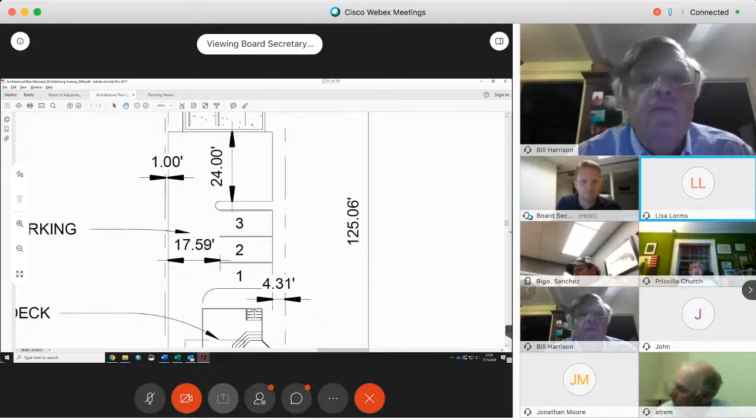Okay, any members of the public who have questions about this application for this witness? I do have some questions. I don't know if you can see. Okay, we have one. Oh yes. Okay, Lisa Lorms, it says, is the name. It appears they have a question. Would you give us your name and address, please?

My name is Lisa Lorms. I'm on Union Street. And my name is Dean Marcos. We're a husband and wife, and we actually own the property next door to this.

Are you going to ask questions only, or are you going to make statements also? Well, I was going to just list some concerns that... Okay, why don't I just do this? Would you both raise your right hands? Do you swear to tell the truth in the matter pending before the board? I do. Okay.

Is it okay if I just list some concerns that we have about that? Yes. Okay, so one concern is this seems to us a large construction project. It's very close to the house and the yard where we have our tenants live and work and play. So we're concerned about the noise and the debris and all that kind of stuff. We're concerned about the traffic both during construction and after that is complete along that driveway, which is...

...to an existing cedar fence that runs the property line. And a third concern is about there's a number of large trees that are also right on the property line that we think could be affected by the new garage, the parking area, the driveway, and construction on the new addition to the house.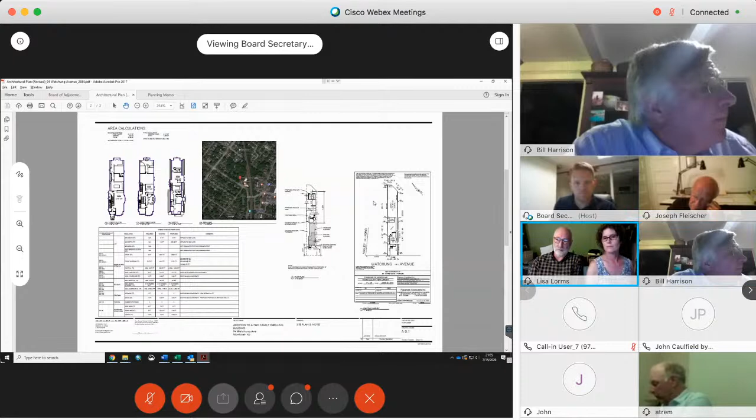In addition to that, we would certainly prefer, if possible, as Mr. Fleischer was mentioning, if we could move the existing driveway, which is virtually on our property line, if it could move a foot over. It's actually on our property in places. In places on our property, but what they're proposing is to leave it on the property line as opposed to a foot away.

And if we're doing all this work, make it conforming where we can make it conforming. Right.

I thought they were doing it a foot away. Well, they're doing it a foot away once you get past the existing garage structure. But you can see on the left side of that drawing that they're showing the driveway, existing driveway to remain, which is one... We can put it on property line, no problem. Right, yeah, so the 1 foot setback doesn't start until you get essentially past the proposed addition.

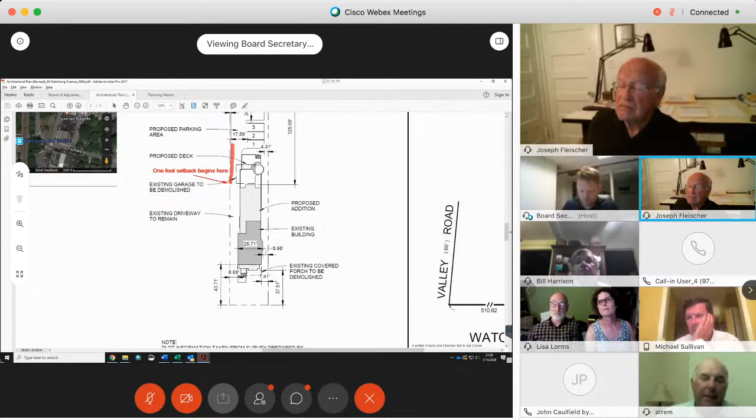Can I address that, Mr. Chair? Yes. All I would say is that this is no different than construction projects that take place all over town, involving all kinds of properties, including similar properties to this. There's construction code requirements that my client and everyone has to follow, and those codes are all rigidly enforced by the building department and perhaps code enforcement, including any disruption with respect to traffic and roads. That all has to be coordinated, and we have to comply, and we will comply with all of the requirements of the construction department, the police department, and any other agency that has jurisdiction over this project and the construction taking place. It's really not something for this board, but I can assure Ms. Lorms that my client will comply and must comply with all the requirements from the building department. Okay.

Do you have any other questions or statements about the application? Did you get your question answered about trees?

I don't know if you can address the concerns about the trees or the fence and the work happening so close to them. We've had experiences with construction next door that killed some large trees on our property. I think it would be great to see on the survey where the trees are.

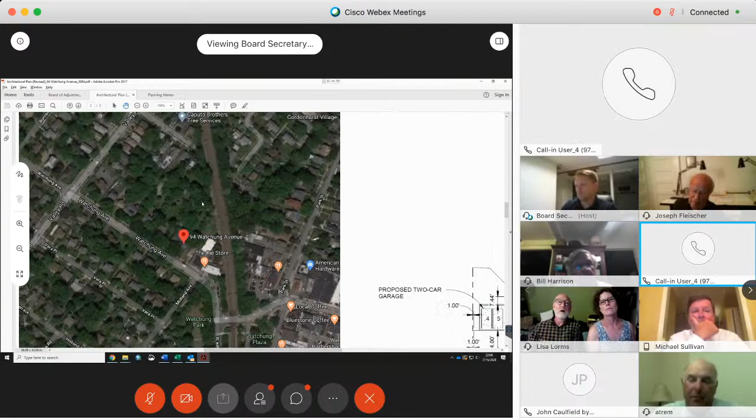I would simply say the same thing I already said. The client is obligated to take appropriate precautions to protect your property as well as trees on your property. And if there's a requirement for a fence as part of the construction code or some other code, they'll have to comply with that.

Have they looked at the trees on the existing property right next to the property line? I can't answer that, I don't know if Mr. Salerno can. I don't really recall these trees we're talking about. There were some trees removed, but some of them right there by the house in the bottom picture on the right.

You can see the driveway which is right on the property. There's trees. I'm not a tree expert, so I cannot tell you how far, but for this picture, the new addition will be about 10 feet from the driveway, and then there's another 4 feet to that tree, so it's about 15 feet.

For previous projects, it seems that the root ball will be away from it. But again, I'm not a tree expert, I cannot testify in that regard.

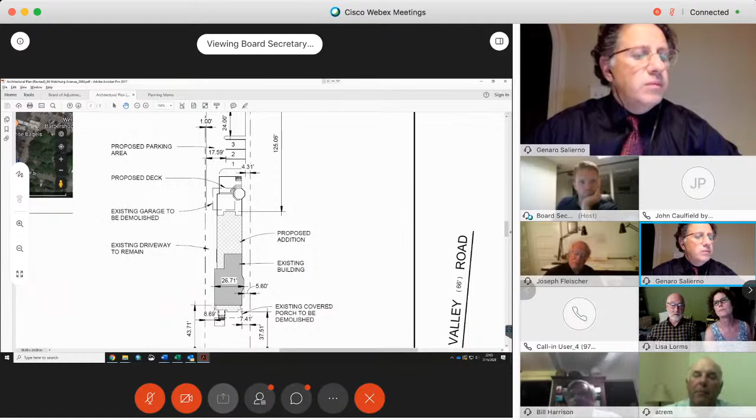Can I ask a question, Mr. Chairman, of the witness? Yes. Do you know how long the driveway has been in its current location, ma'am? No. Is he asking us? Yes. I was asking you if you knew.

The tenants at that property have been creeping onto our property for a long time, and I've actually been considering putting up a fence for a long time, continuing our fence and attaching it to the house. But because I'm a nice person, I didn't do it because I felt bad for them. But I would really like to extend my fence connected to my house, and my tenants would like this as well. So it would really be helpful if the driveway was not right up on my property.

Okay, do either of you have anything further you want to say about the application? No, thank you. Okay, are there any other members of the public who have questions or testimony or anything they want to say about the application?

No, Mr. Chairman. Okay, I have a couple of questions.

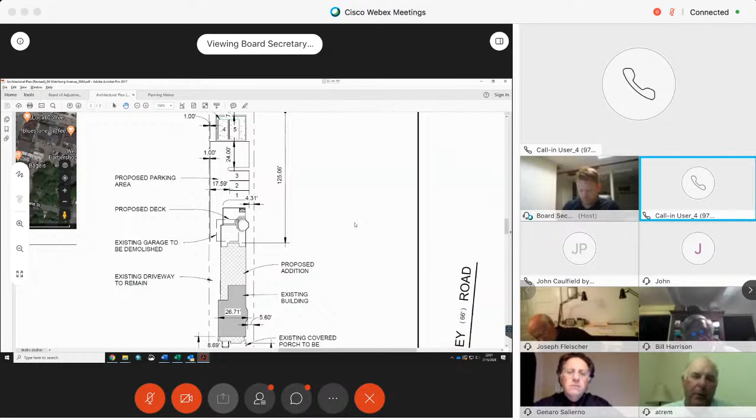Mr. Trembulak, do you have anything further? I don't think so, Mr. Chairman. There's 3 variances: for the non-conforming lot width, which we can't do anything about. The side yard setbacks for the existing building, we'd like to continue those setbacks. They are non-conforming, but minor, less than 1 foot on one side and slightly more than 1 foot on the other. If the board is not inclined to grant that variance, the house could be built in conformity, as Mr. Salerno has said. The other variance is for the parking area, which to me is the driveway, but I understand it's considered part of the parking area, which requires a greater setback, although the driveway can be 1 foot from the property line, and that's essentially what this condition is. So I think those variances can be justified under either C1 or C2 criteria.

And it's also clear in response to the last questions that if there's going to be a new driveway, it should conform with the setback requirement of 1 foot.

We'll start discussion with Mr. Simon. So to be clear, the driveway setback of 1 foot, is that going to start from the front of the house or just from the front of the addition?

In the way we are showing it, it's going to start where the existing garage is. From the garage, okay. So since you have to do the entire driveway, I would like to see the 1 foot start from the new addition going backwards. Could we do it maybe 20 feet back? Because if I do it from where the addition starts, it's going to be difficult to maneuver there. They might keep hitting the edge, so we might need maybe 10, 15 feet and then start the 1 foot.

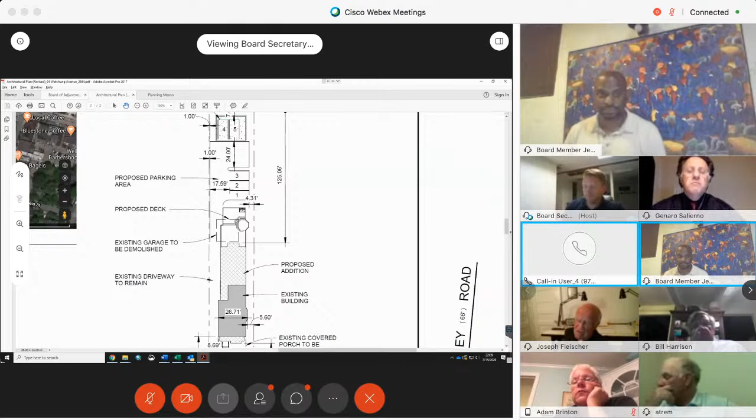Okay, so at the least I would like to see it start from the back of the existing building, so you have that little section where you can make that slight turn. But from the back of the existing building, I think it would be doable to start the 1 foot. Other than that, I'm generally in favor of the application.

Ms. Church? Go ahead, Ms. Church. Sorry about that. I'd be in favor of the application with the proviso that the driveway be set back to accommodate the neighbors' concerns.

Mr. McCulloch? I'm also generally in favor. Mr. Caulfield? I'm in favor, I just want the driveway that's on that woman's property to be put on our property, but I'm in favor of the project. Okay, Ms. Gilmer? I'm in favor, with the same concerns about the driveway.

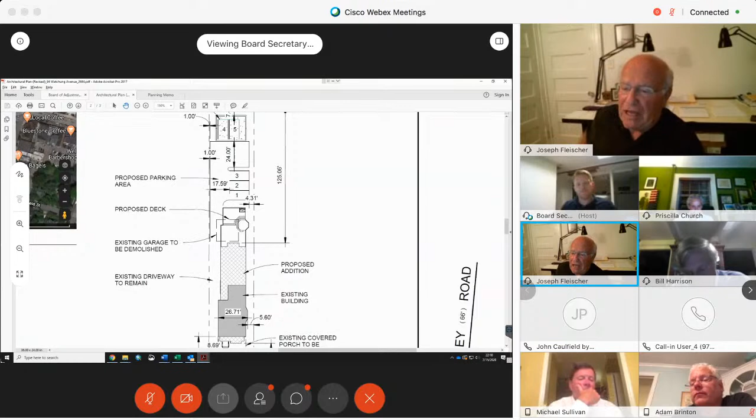Mr. Fleischer? I have a number of concerns about this application, which is why I raised the issue to begin with, the lot width and the width of the building and the work being done. I would like to see a number of conditions placed on this, including protection of the trees on the neighbor's property, including a construction fence running the entire length of the property. And if the construction trucks can't get through between the existing house and the property line, I don't know how they're going to drive through it or live with it that way afterward, because I'm not sure construction trucks can get back there if there's a construction fence on the property line.

So this house is wider than it needs to be. I would be much more comfortable with a design that allowed for the 10-foot setback on the side adjacent to these other residences. I'm not certain if I'm in favor of it, but I think if it is approved, it needs to address all of those concerns, from protection of the trees to a construction fence that protects the adjacent property, and that fence should run the entire length of the property line.

If construction vehicles and others can't get through there, that tells you right away why the entire building is too wide for that particular site. It could be and should be the 10-foot requirement on that side of the lot. I don't have any problem with 5 or 6 on the other side, but there's no reason why you can't get a really lovely house there with 10 feet of clearance on that west side of the house. So I've got some real concerns, but I ask that if it is approved, those kind of tight conditions be placed on it, particularly the construction adjacent to where some of those trees are, since the new garage could further damage the trees. I think there are some real concerns here with the width of the property.

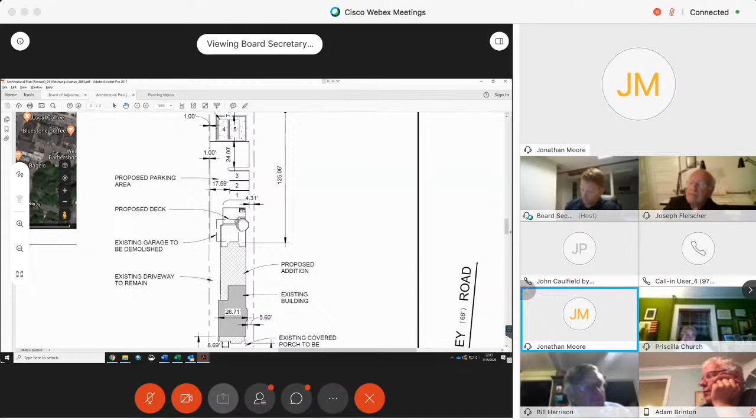That's all I have. Mr. Moore? I am generally in favor of the application with the restrictions that have been recommended by other board members. I'm not in favor. I have basically the same concerns as Mr. Fleischer.

In terms of the variances being requested, the lot width, I have no problem granting that. It's been an existing condition and there's no reason not to grant that variance. I don't have a problem with the 1 foot setback for the rear parking area. As for the side yard setbacks, the setback on the eastern side, I don't have a problem with. The setback on the other side, I think I want to approach this in terms of the driveway.

I want the driveway to maintain a 1 foot setback from the adjacent property for its entire length. That may have consequences in terms of what they're doing with the house on that side, but I will let them determine whether the driveway will then be wide enough or not. Before that driveway is installed, I want the 1 foot marked off so it is installed in the right place.

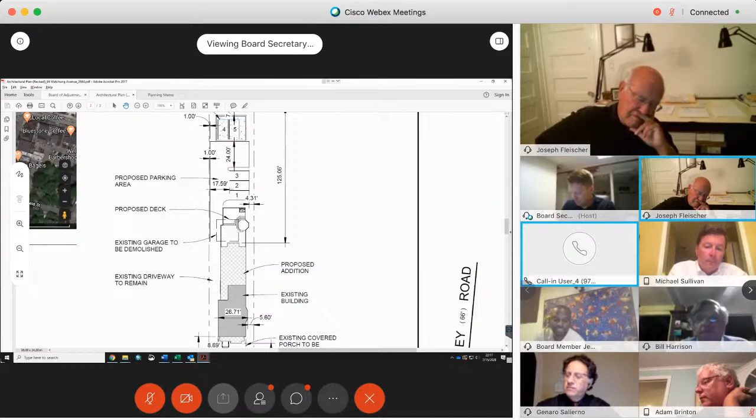Motion to approve the application with the conditions of the driveway and hiring of the tree consultants. And was there one more? The fencing—either getting a soil conservation district permit, which would require the fencing, or if they don't need one, that fencing be installed along the two side property lines. Motion to approve the application with the conditions just mentioned.

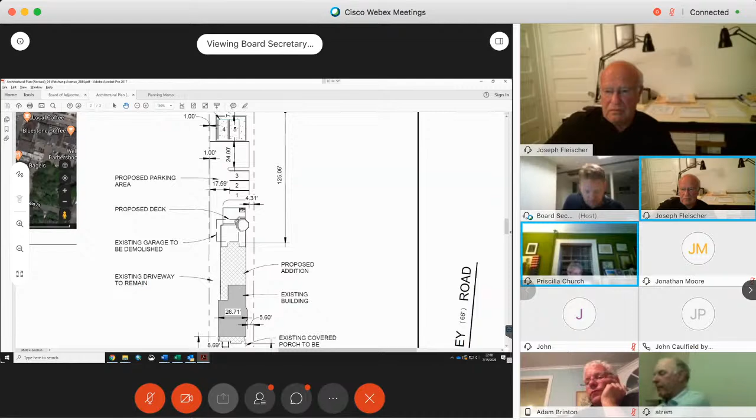Second. Who was the second? Sorry, who was the second? Oh, Ms. Church. Yes, I second. Okay, we'll call the roll. Ms. Gilmer, yes. Mr. Caulfield, yes. Mr. Simon, yes. Ms. Church, yes. Mr. McCullough, yes. Mr. Moore, yes. Mr. Fleischer, no. Mr. Harrison, yes. Okay, the application is approved.

Okay, so that's it for tonight. First, we should all congratulate Mr. Petto. He is now father of a new son. Congratulations. Thank you. Congratulations. And we thank him for getting us together tonight in spite of that. Appreciate it. Sorry if I'm a little tired.